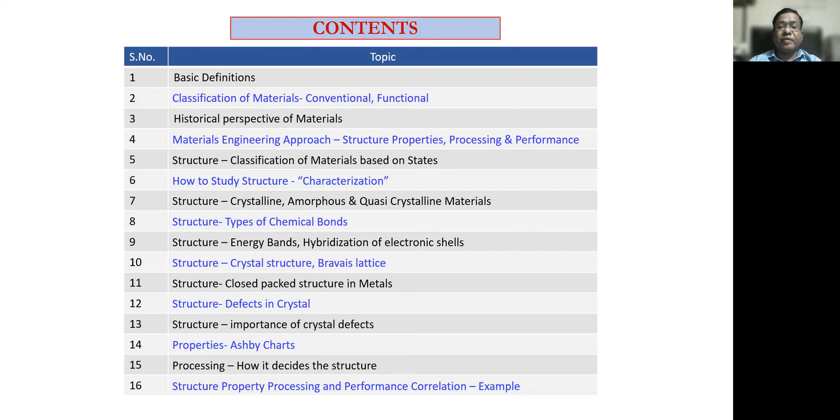Then we'll be studying an overview of properties, Ashby charts, processing, how the processing decides the structure. And finally, we will be discussing an example of structure, property, processing and performance correlation. So basic definition, material science. What is material science? Material science involves investigating the relationship that exists between structure and properties of the materials.

And what is materials engineering? Basically, whatever we have understood from material science, making use of that for designing or using engineering materials to design different structures. So these are the terms, material science and materials engineering.

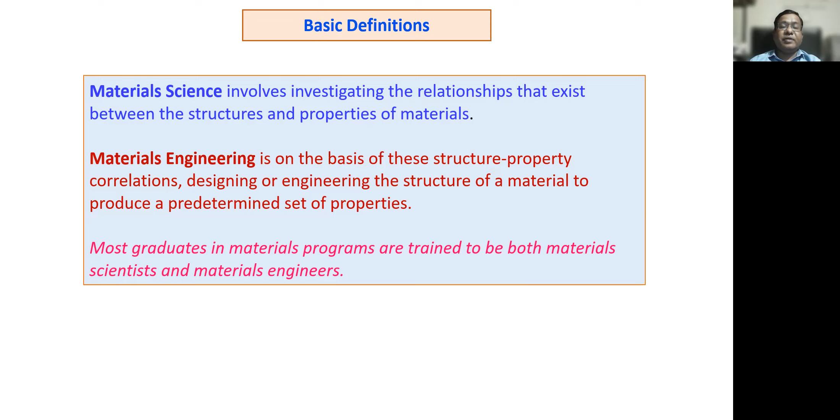Nowadays, most of the graduates in materials programs, maybe metallurgy, maybe materials science, maybe materials engineering, are trained to be both material scientists as well as materials engineers. Means they will be synthesizing the materials as well as using the material property-structure correlations for different applications.

So what is metallurgy or what is metallurgical engineering? Metallurgy is an art and science of extracting metals from their ores and modifying metals for use. So this is the very basic definition. And why is it art? The first word is art because humans started using metals without knowing the science behind it.

And later, during the industrial revolution and scientific progress, humans understood various scientific aspects of metallurgy and materials engineering. That's why it is an art and science of extracting metals from their ores and modifying the metals for use. So basically there are three branches of metallurgy.

First is extractive metallurgy or process metallurgy. It is related to the extraction of metals from their ores and refining of the metal. It also deals with the reaction of metals with slags and gases. So basically people in various steel plants work in extractive or process metallurgy. And what is physical metallurgy?

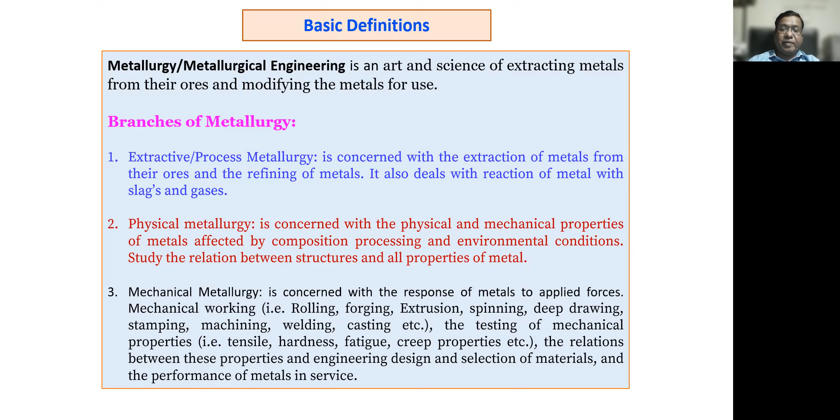So we know the classification of materials. There are different classes. Metals, this is the first category, and then plastics or polymers, the second category, and ceramics and glasses can come under the third category. And the fourth category is a new category, that is composite materials.

In metals, there are basically two distinct classifications, ferrous and non-ferrous. Ferrous is basically iron based, and non-ferrous may be aluminum, copper, titanium based. These can be non-ferrous metals. And plastics are divided into thermoplastics, thermosets, or elastomers.

Thermoplastics, as the name suggests, we can heat and cool multiple times to shape. Thermosets, once they are heated, become plastic, and after cooling, they will not again become soft under the application of heat. And elastomers have elastic properties, like rubber, silicones, polyurethanes. So plastics, or polymers more specifically, are the second category.

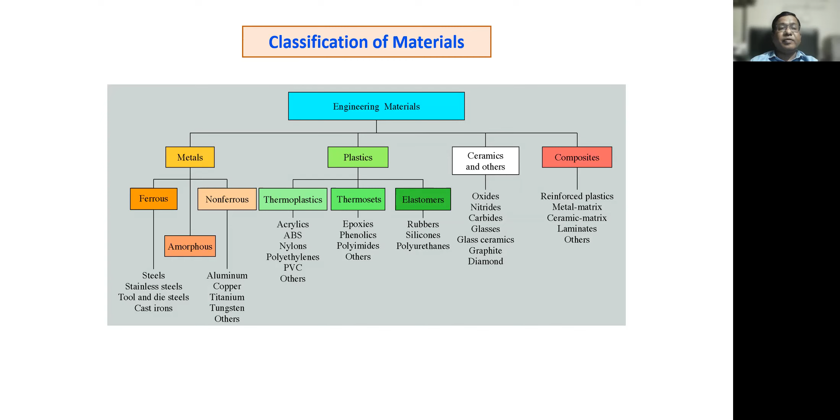And ceramics are oxides, nitrides, carbides, glasses, glass ceramics, graphite, diamonds. A lot of materials come under ceramics. And composites are basically any two categories, like metal-plastic or plastic-ceramic, any combination, or we can have different forms, like carbon can make a composite with graphite, or carbon fiber can make a composite with some carbon based resin, something like that.

So everybody knows these classifications. We can see metals, ceramics, polymers, composites. So this classification is a conventional classification. Conventional means basically this is the very raw classification. Raw means this classification is basically based on the properties of materials.

Okay, like metals. Metals have high tensile strength, less compressive strength. They can be deformed into shape. Ceramics cannot be deformed into these shapes. And unlike metals, ceramics are brittle. They cannot be ductile, they cannot be shaped like by rolling, but they are good in compressive strength. And ceramics are basically porous materials. They have a high melting point.

Metals also have a high melting point. Metals have a metallic bond. We'll be studying this under the types of bonds. And ceramics can have covalent or ionic bonds. So metals are mostly crystalline materials. Ceramics can be crystalline as well as amorphous.

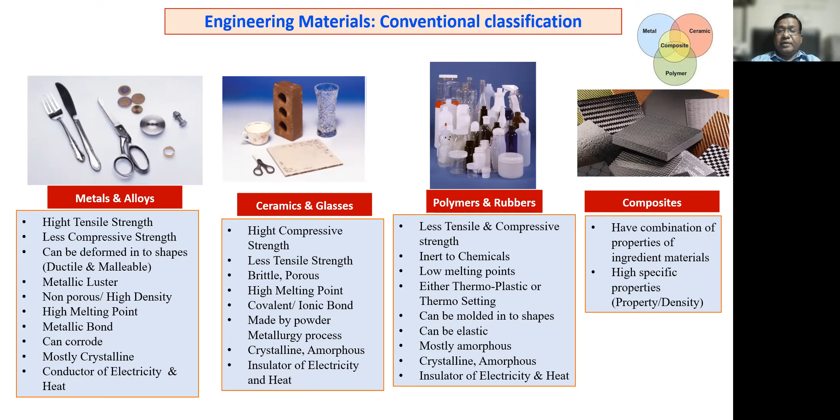So suppose strength is there. If you want to calculate the specific strength of a material, strength most of the time we consider as tensile strength. So specific strength of a material can be tensile strength divided by its density. Composites give very good properties at a lighter weight or lower density. That's why composites are being used in aerospace applications.

There is another classification of engineering materials, the functional classification. Functional classification is based on whatever the use is. So this is not a rigid kind of classification. Here we are seeing 1, 2, 3, 4, 5, 6, 7, 8 classes, but it is not fixed. We can generate as many classes as we like depending upon the application. For aerospace: carbon-carbon composite, SiO2, amorphous silicon, aluminum alloy, super alloy, Zerodur.

In the case of biomedical applications, there is a requirement of biocompatibility with the human body, and they should be lightweight. So naturally the candidate materials can be titanium, stainless steel, shape memory alloy, plastic, PZT. Then electronic materials like silicon, gallium arsenide, germanium, barium titanium oxide. These come under electronic materials.

Then energy technology, like UO2, NiCd, ZrO2. These are related to energy technology and environment. Then magnetic materials, optical materials, smart materials, structural materials. So there is a vast application of materials, and we can make as many classes. Metallurgy is not only traditional metallurgy like steel making, iron making, or some non-ferrous metals, casting, rolling, forging. Nowadays every field of application requires different materials.

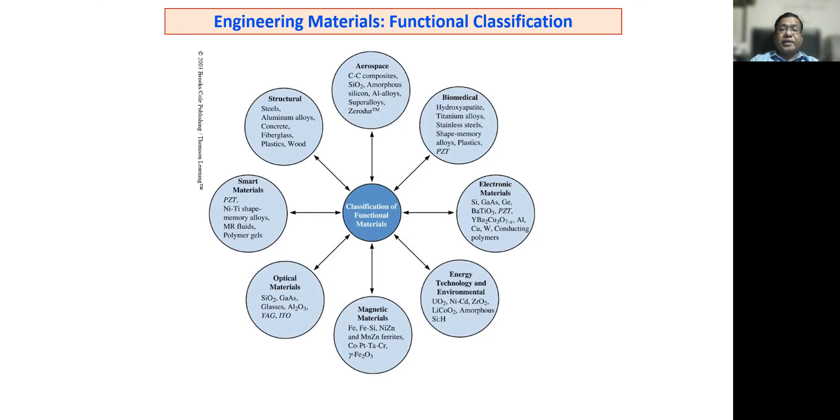In the case of magnetic materials, nowadays companies like Intel and other chip making companies that make computer chips are basically trying to write on the smallest dimensions. They are trying to write at the atomic level. So in data writing nowadays, we have more data storage in a small space. That is related to the functional classification of the materials.

Now we will understand how these metals or materials are linked with human life. This is my personal opinion. The history of human civilization is linked with the use of materials. There are different civilizations named by the materials they used, like the Stone Age, 2.5 million BC, the Bronze Age, 3,500 before Christ, and the Iron Age, 1,000 before Christ.

So you can see humans started making use of stone tools or utensils. Then the first metal humans might have used is bronze, some casting, and later they understood the metallurgy of copper and later iron metallurgy. As humans learned more and more about materials, life became more and more comfortable. We cannot think of today's human life without engineering materials.

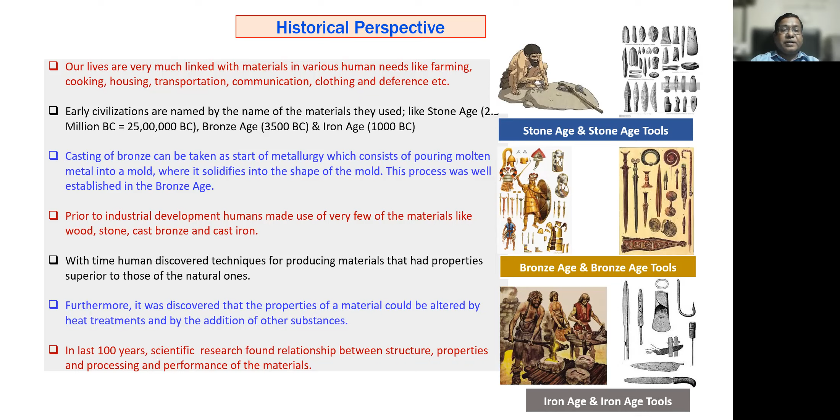So this is what I wanted to explain. This is a materials engineering approach. Hereafter, people are not using the term metallurgy, because metallurgy education, as I told you, is not only limited to steels, non-ferrous and foundry, but there is learning related to other materials also. So what is the materials engineering approach?

Suppose you want to define the structure of a classroom. I generally give this example. A classroom can have a blackboard or whiteboard, a faculty member, meaning a teacher, and students, then tables, then chairs for students. All these things define the structure of a classroom. At the atomic level, structure encompasses the protons and neutrons, how many protons, how many neutrons, and then electrons, how they are arranged in different shells. That can be an atomic structure.

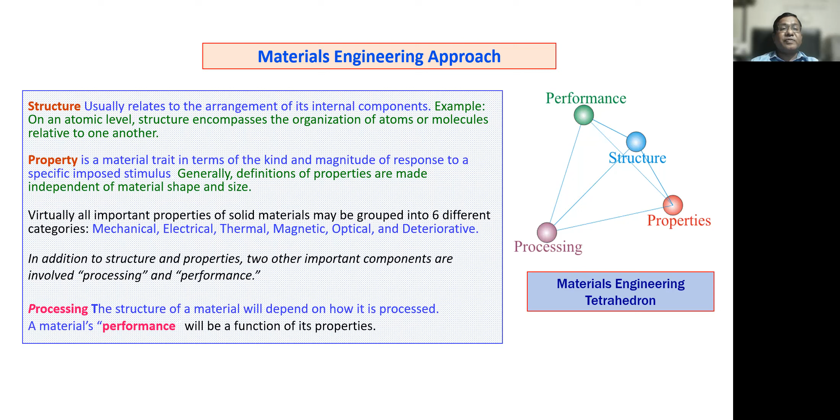So we know structure is an internal arrangement. So how do we study structure? The answer is characterization. Characterization is a general term. Basically, it is the process by which materials' structure and properties are probed or measured. Okay. So basically, like a stethoscope, the doctor is probing our chest.

So characterization is a technique. These are different techniques. Basically, we are probing the materials to understand their structure and some of their properties. So it is a fundamental process in the field of materials science. Without it, no scientific understanding of engineering materials could be ascertained. So there are various characterization techniques: optical light microscopy, also called OM or LM in short, X-ray diffraction, scanning electron microscope, SEM, transmission electron microscope. These are some of the characterization techniques.

And what is the difference between testing and characterization? Testing is something like standing on the weighing balance and seeing your weight. So that is testing. And if you are going for a bone X-ray, that X-ray is different. That X-ray radiation is a different thing from X-ray diffraction. It is just like light diffraction. So anyway, if you want to find a fault in your bone, you will be doing an X-ray.

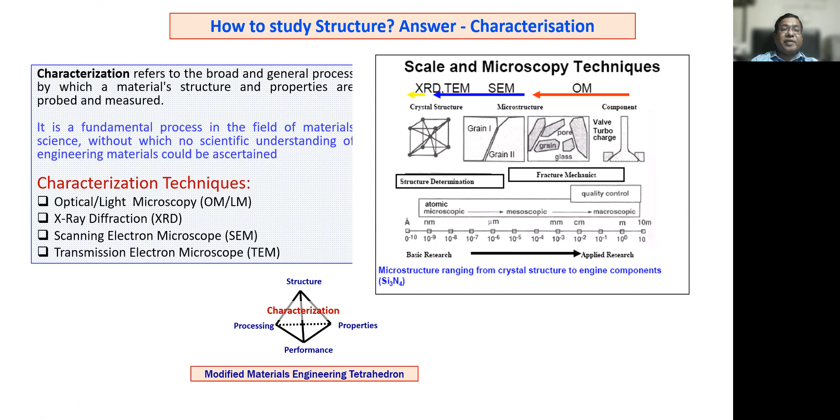Atomic structure is in angstroms, then short-range atomic arrangement, nanoscale, microscale, and macroscale. Differences in optical properties are consequences of differences in structure, which result from the way the material has been processed. So we can change the structure by changing the manufacturing process. Some process can be casting. We can slowly heat or slowly cool. These are the variations. There are a lot of different things and terms, but roughly you can understand this.

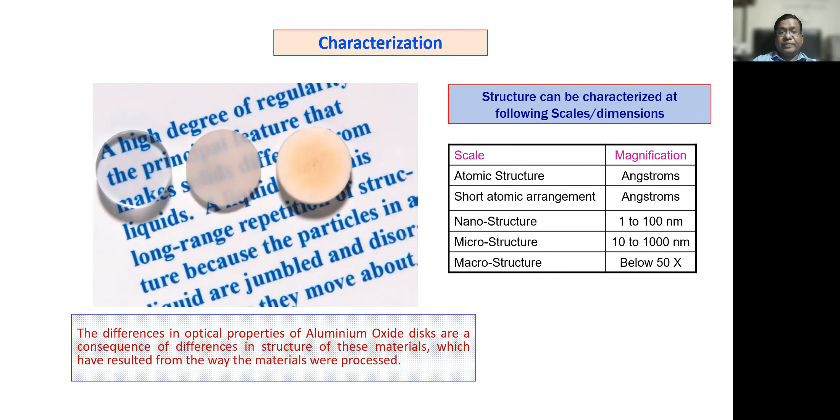So if we change the processing, the structure changes; if the structure changes, the properties change; and if the properties change, the performance changes. So what is performance? Performance is the ultimate goal. Here, transparency is the performance in the case of this aluminum oxide disc.

So structure, again, we are going from the very smaller scale of magnification or smaller scale of dimension. So structure can be divided on the basis of states. So we can have different states of materials: solid, liquid, gas, and plasma. So in solids, these atoms are held firmly at a place. They can vibrate about their mean position, but they cannot leave their position. So this kind of arrangement is called a solid.

And in case of liquid, the atoms or molecules can easily flow around one another, but they cannot go far away from each other due to the force of attraction. So the liquid can take the shape of a container. And in case of gas, these atoms and molecules can fly from each other in all directions. So the distance between them doesn't matter; the attractive forces between them are insignificant.

And the fourth is an advanced thing, that is plasma. So plasma is a state where the whole atomic structure has been broken. You can see positive charges, negative charges, protons. Everything has been broken out. Nowadays we are generating artificial plasma in some heat treatments, like plasma nitriding, in metallurgy. But naturally, plasma exists at star temperatures, at a very high temperature, basically.

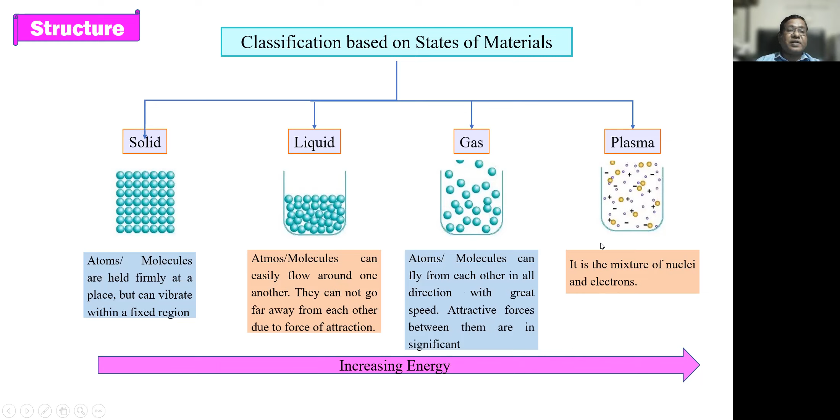So that's why it is shown in increasing energy. If we give energy to the solid, it can become a liquid, and further giving energy, it can become a gas, and further giving energy, the whole atomic structure will break and go into a plasma state.

So why am I teaching all these things from the basics? Because we have understood these in chemistry and physics, maybe in 7th, 8th, 10th, 11th or 12th class. There is always a purpose and always a link; those concepts are always linked with each other. That's why I'm revising all these things. We know all these states, but we don't know their link with crystallinity and amorphous structure. We don't know what quasi-crystalline structures are in nature.

Okay, so this lecture is a very important talk. Whoever is interested to work in metallurgy, if he understands this talk, there are a lot of things I have brought together and tried to establish a whole linkage.

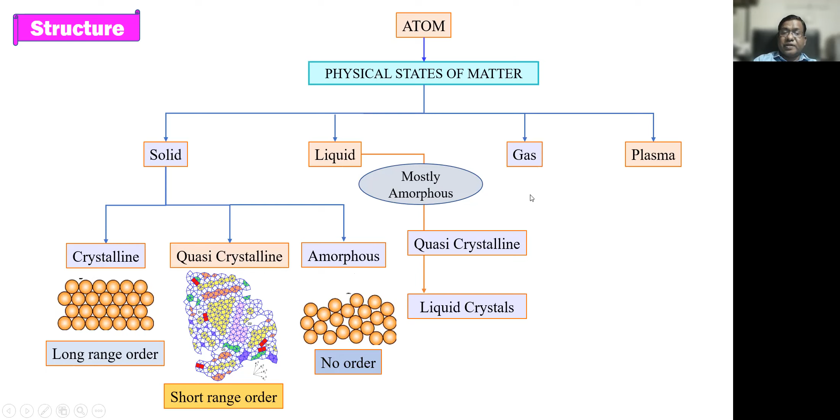So in case of metallic bond, metals are having most of the time one, two or three electrons in their valence shell, so they cannot either share, or donate or accept the electrons like the other two bonding mechanisms. In covalent bond, there is always sharing. In case of ionic bond, one is donor, one is acceptor. So one becomes a cation, the other becomes an anion, so there will be electrostatic force of attraction.

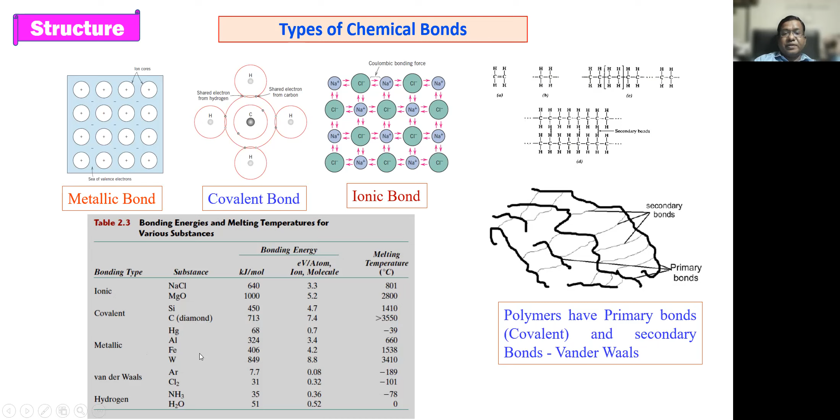So then we can review the structure, how the structure is important and how it changes properties. All chemical elements are made up of three entities: proton, neutron, and electron. And all these particles have equal weight and size. The proton of hydrogen will be equal to the proton of helium, likewise neutron and electron. Only the number differs.

So this is hydrogen: one proton, one neutron, one electron is basically hydrogen. And if there are two electrons, two neutrons, two protons, that becomes a different element. See, if the atomic structure changes, the element will change. That's why atomic structure is important.

Then there is another explanation of atomic structure, that is energy band structure. Energy band structure basically has three bands: a conduction band, a valence band, and a filled band. The band gap between valence band and conduction band makes a material an insulator, semiconductor, or conductor. If the band gap is very high, valence electrons cannot jump easily to the conduction band, and they are not available for electrical or thermal conduction.